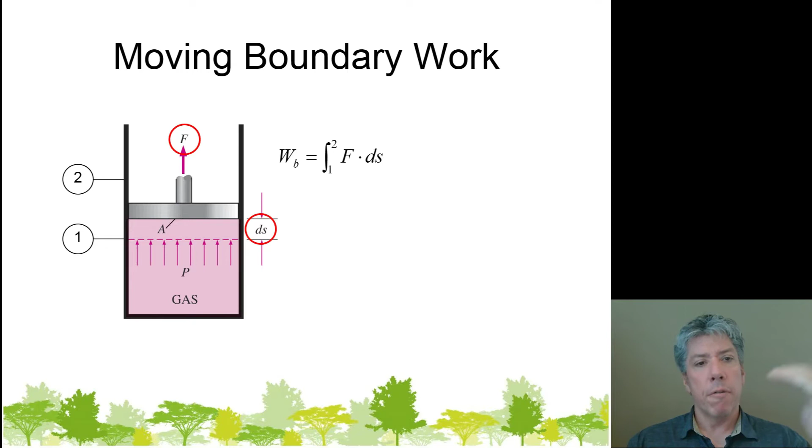And so the boundary work in going from state 1 to state 2 would simply be the force integrated over the distance. Because understand that force comes from the pressure, and the pressure is changing, so the force is changing. The force is decreasing. Now understand, we're assuming that there's no friction on the sidewalls and that no gases escape around the sides of the piston. Now that's an important assumption. It means that this system is reversible, but we'll talk about that in a subsequent chapter.

For right now, what you need to know is that this is a perfect piston cylinder device, and the gas is doing work pushing the piston up. So we'll plug in the force, we'll plug in the differential distance, and integrate between the two states. Okay, well, what else could we consider? Well, the force is generated by pressure in the gas, so the pressure of the gas times the cross-sectional area of the piston should be equal to the force, since there's no friction on the sidewalls. So we can make the substitution that the force is equal to pressure times area, and you see the substitution in the equation there.

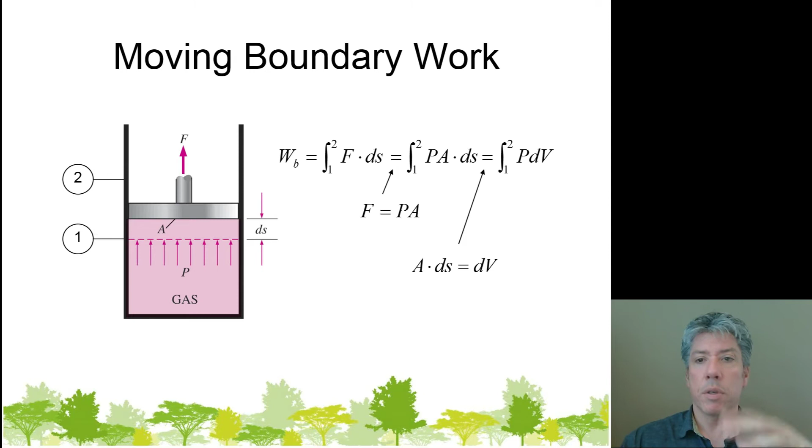Now, if we think a little bit further, the cross-sectional area times the differential distance is the differential volume change of the gas, right? So area times that distance is dV. And if we make that substitution, then we end up with an equation that says that boundary work is the integral of PdV. And this is really important because we've gone from some force that the piston is pushing on whatever it's pushing with and distance. We've gone from that to properties of the gas, to pressure and volume of the gas, and that's a really important transition. Now, we had to make some assumptions along the way. For example, that this was a reversible thing, but this is where we are.

So now, all of that is great, but here's what you really need to know. Boundary work, the work done by a gas as the gas expands, is equal to the integral of PdV. Now, this is the non-integrated form, right? This is the integral form. I will not have you integrate this. I will integrate it for you several times, and I expect you to write them down in your book in the summary. This author has a really nice summary at the end of every single chapter before the problems are presented.

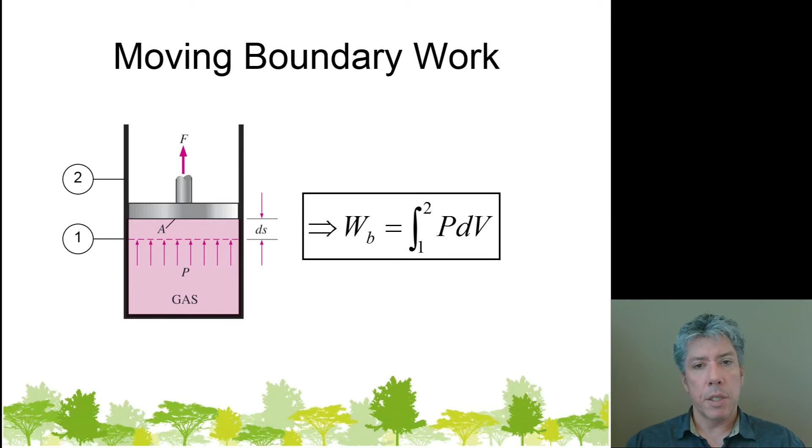Why didn't we just put a d there, since it's a differential amount like we did with volume, right? We've got a little d in front of the volume, and you understand that means a differential change in volume. Well, the reason that it's a different symbol is because the boundary work is not a property of the system. Okay? The boundary work depends on the process path. Just like we saw before, depending on what path the system takes, the amount of work done by the system or on the system will vary.

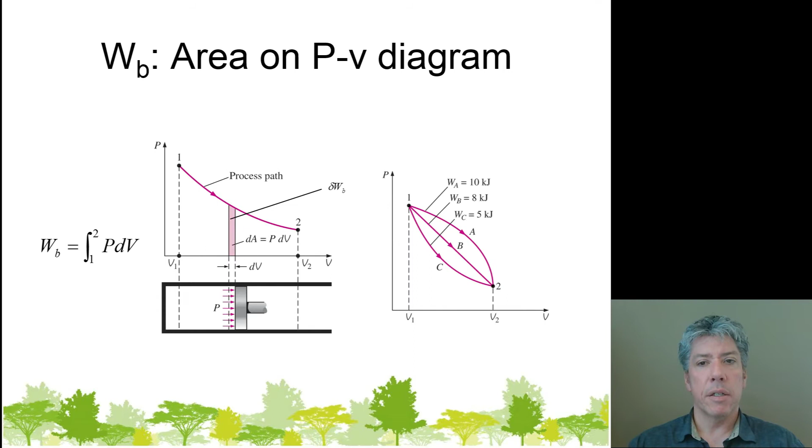And so there can be multiple different process paths that involve a differing amount of work. We can have a process path that encloses more area, and that process path then represents a higher level of work interaction, a greater magnitude of work interaction.

So our basic idea here is that if we could have a system where we put a small amount of work into it but get a larger amount of work out of it, by going on a cycle, then we're back where we started. We can run that cycle over and over again and produce a net amount of work. So the forward process in this case is something that generates more work than the reverse process, C, consumes, and we generate a net amount of work by operating this thermodynamic cycle over and over again.

You might look at this and say, well, wait a second. Number one, this sounds like you're trying to make energy out of nothing, and you've already said that perpetual motion machines don't exist and can't happen. Number two, is there any practical place in the real world where this could be used? Well, actually, there is. The answer to both of those questions is that this already exists. Now, it's not making energy from nothing. Let me give you the practical example.

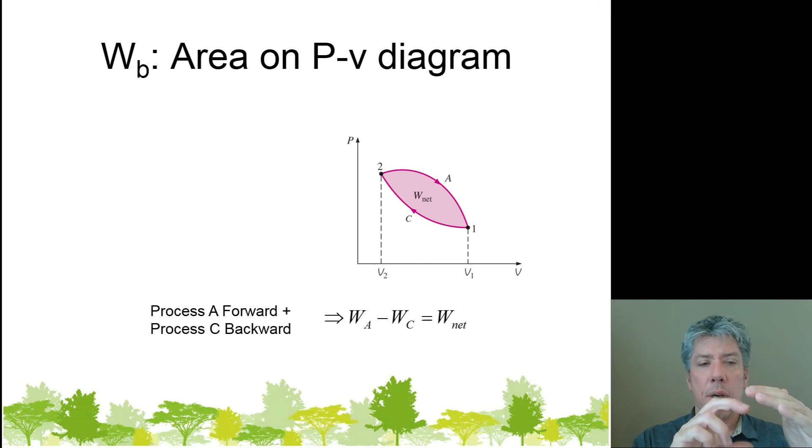If you think about your piston cylinder engine that probably pushes your car down the road. Most of you probably don't have electric cars yet, and that's fine. What happens during the process is that the piston compresses an air-fuel mixture. Now that air-fuel mixture burns relatively rapidly, and then the gases above the piston are at a higher pressure even than after compression, and as they push the piston down, they generate more work than the piston used pushing the gases and compressing them. Okay?

So the forward process is the expansion, or what's called the power stroke, and that generates a whole lot of work output, right? Because the gases are really hot. But then we bring in some fresh, cold gas, and I don't mean gasoline, I mean air and gasoline mixture, and we compress it, but since it's already cold, yes, its pressure and its temperature go up, but it doesn't take as much work to compress it as what we're going to get out of it when we burn the air-fuel mixture. So this is already the compression stroke and the power stroke in your car's engine.

And we're not generating energy or creating it from nothing, because it's the thermal energy from burning the gasoline in the air that is transformed into the excess work. Okay?

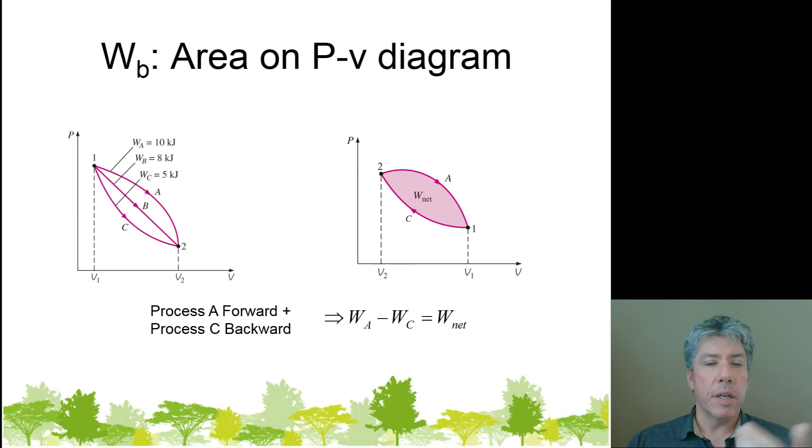So depending on which paths we choose, we can get more or less energy out of one cycle, because we can choose different process paths to move along. Now there are special cases of boundary work where we will want to evaluate them quickly and easily. In translation, you probably don't want to integrate the boundary work equation every time I give you a boundary work problem. So let's look at some special cases where I can give you the integrated form.

Basically, we just need cases where the pressure and volume relationship is known, because if the pressure is known as some function of volume, then the shape of the process path is determined, and therefore the area beneath that shape, in other words the boundary work, is also determined. So let's consider the special case of a polytropic process. You might look at this and say, well, it kind of looks like an ideal gas equation, PV to the N equals C, where C is a constant and N is a constant.

Well, this is not an ideal gas equation. It looks like it, but it's not. It is related to ideal gas, but we'll approach that later. This is an equation that could apply for real gases. It depends more on how the gas is expanding and the particulars of the expansion or compression process that determines whether or not it's a polytropic process. In short, I would have to tell you if I'm giving you a problem that is a polytropic process problem.

Now, I might tell it to you in a sort of sly way. For example, if I give you the pressure to diameter, let's consider the system as just a sphere, okay? If I just give you a sphere like a balloon or something, and I tell you that the pressure and diameter of that balloon are related, and I give you an equation to relate the two, I may have just given you a polytropic equation, because diameter and volume are related to one another, right? At least for that sphere.

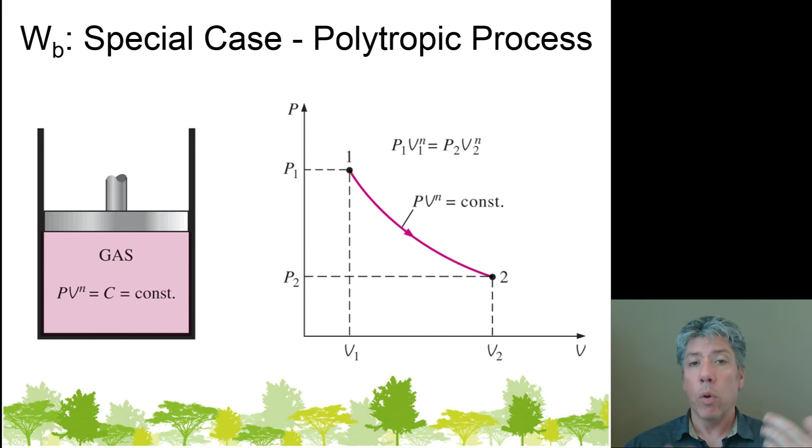And so you could ultimately come up with a relationship between pressure and volume, and that relationship may be a polytropic relationship. So you may have to work with the math a little bit to figure out if I've actually given you a polytropic process. The second question students ask is, okay, do we look up these constants N and C somewhere for particular gases? Well, the answer to that is no. I would have to give you those as well, or give them to you in, again, a sly way.

So we've got the integral from state 1 to state 2 of the pressure, which is CV to the negative N dV. If you remember your rules of integration, you might remember the integral of x to the n dx. That's the rule we're using here, and I'll let you review it and see how it applies if you wish. I'm not going to go through those details. But once we integrate V to the negative n, we end up with V to the negative n plus 1 in state 2 minus V to the negative n plus 1 in state 1 over negative n plus 1.

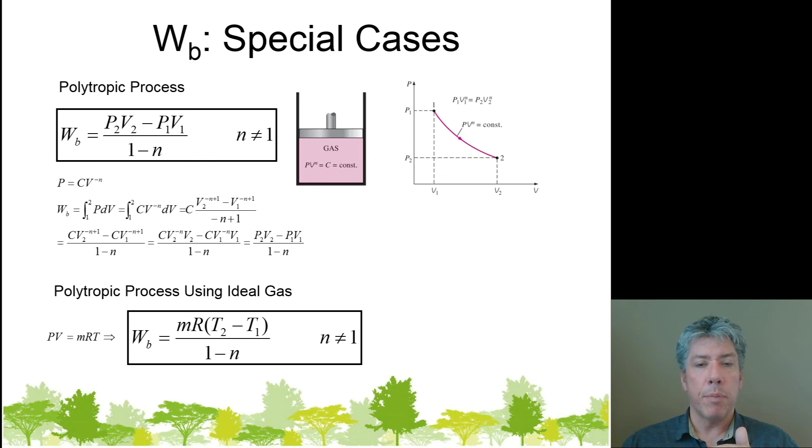But we still have the same restriction on this equation. As a matter of fact, we have more restrictions on this equation than we had on the first, because now not only does the process have to be polytropic, the gas has to be an ideal gas. And again, this still doesn't work if in the polytropic equation describing the process n is equal to 1.

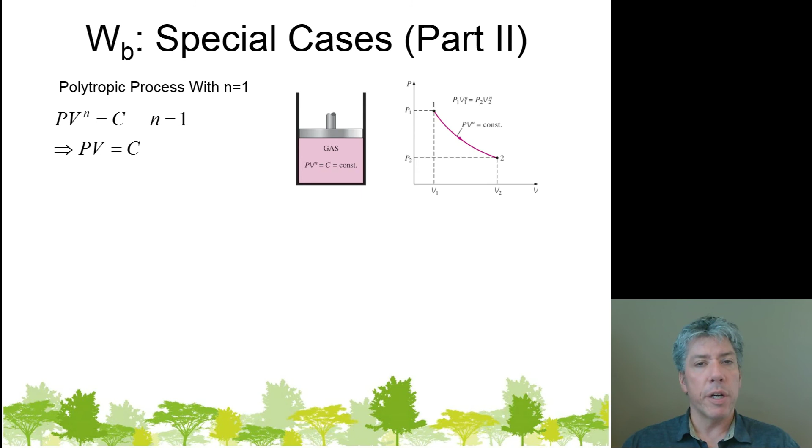So you should write that equation, or both of them, into your text. I think the first one with P2 V2 minus P1 V1 is already in the back of the chapter in the summary, but the one for polytropic ideal gases may not be there, and sometimes it's more convenient to use than the P2 V2 minus P1 V1 equation.

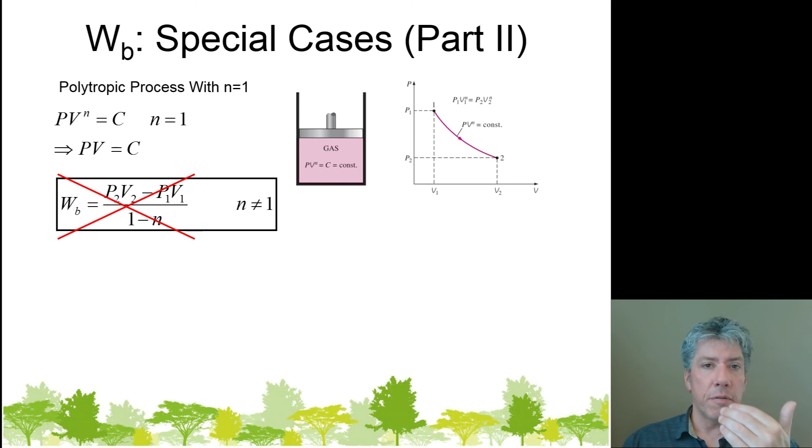Now, just like any other time, when you see we can't do this, where do you want to investigate? In that area, right? So what the heck happens when n is equal to 1? Well, then the integration is just a little bit different. If n is equal to 1, and the process is behaving PV equals C, can we use this equation? No, because it's understood that the exponent on V is a 1, and that doesn't work. What can we do then?

Well, it turns out we end up with the exact same form of the equation if we have an ideal gas at constant temperature. So unlike the last equation, which was mR quantity T2 minus T1 over 1 minus n, we now have a situation where we can have either a polytropic process with n equal to 1 or an ideal gas at constant temperature, and the equation we develop will work for both.

Why would that be? Well, if we have an ideal gas at constant temperature in a closed system, then the form becomes PV equals C. It's the exact same mathematical form as a polytropic process with n equal to 1. In that case, the pressure can be replaced by the constant over the volume, and now we have a form of 1 over x dx. And if you remember how you integrate that, it just becomes a natural logarithm of the variable, so the natural logarithm of the volume, evaluated from state 1 to state 2.

So that's C times the natural logarithm of V2 minus C times the natural logarithm of V1 if we distribute the C. But from our rules of logarithms, when you have two natural logs, one subtracted from the other, you can put the argument of the negative term into the denominator of a fraction, and the positive term argument goes in the numerator. So if you remember this, great. If you don't, it's okay.

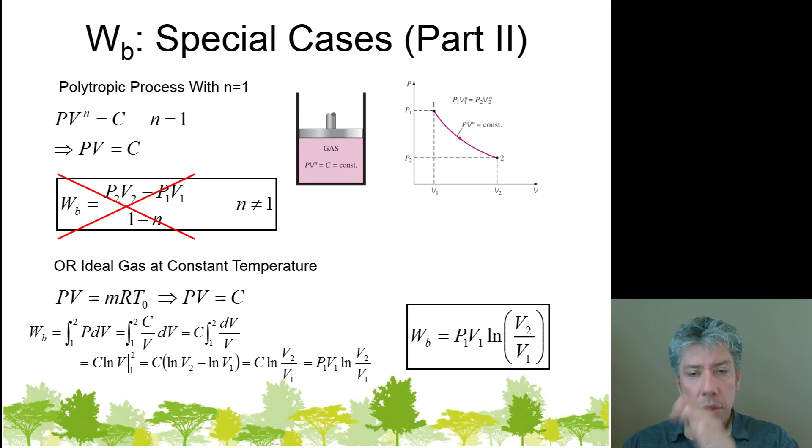What are the restrictions? Well, you either have to have a gas that is ideal at constant temperature, or you have to have a polytropic process with n equal to 1. Then this equation will work for calculating the boundary work.